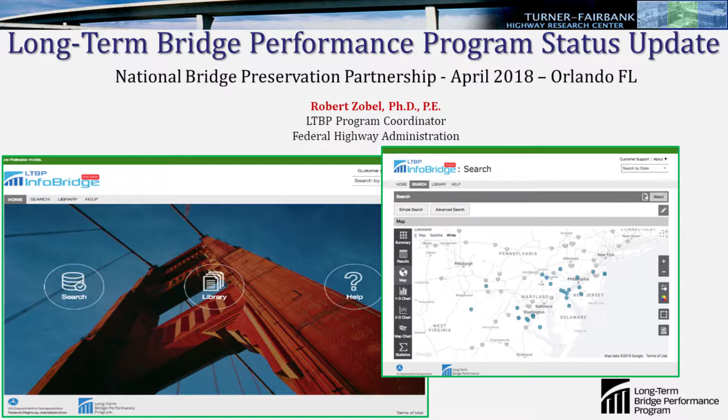Quick question. I have a couple of questions. How many folks in here, it's probably easier for me to ask the negative, have not heard of the LTBP program? Okay, so everybody's heard of it. How many folks in here have not heard of LTBP's bridge portal? Okay, so a few people haven't heard of that, so I'm going to talk a little bit about that. And you can actually see a couple of the screen splashes up here on this first page, and for those of you who are familiar with LTBP's bridge portal, it might look a little bit different to you here, and so I will talk about that.

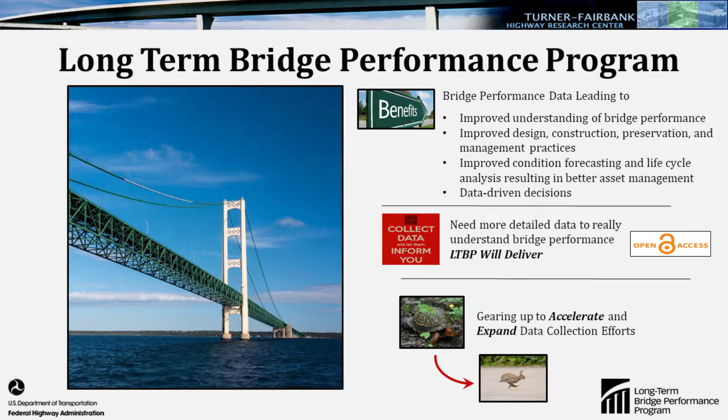The long-term bridge performance program, what we're really all about is getting out there and collecting bridge performance related data on a subset of bridges nationally. The real idea behind it is to improve our understanding of bridge performance, improve our understanding of construction preservation practices, to get a little better understanding and to know what's really the proper thing to do. Improved condition forecasting and life cycle analysis, and leading to data-driven decisions. We're really all about data. What we need is more data.

I know that some of you may have been in the room this morning when Dr. Moon was talking about both a bottom-up approach and a top-down approach for assessing data for the purposes of bridge performance. LTBP is actually involved in both a top-down and a bottom-up approach. We do recognize fully that it has taken some time for us to gear up and get going with our data collection. I'm going to talk a little bit about the data that we've collected to date. I'm also going to talk about the plans that we have to accelerate that data collection on more of a national basis. So that's primarily the things that I'm going to discuss today.

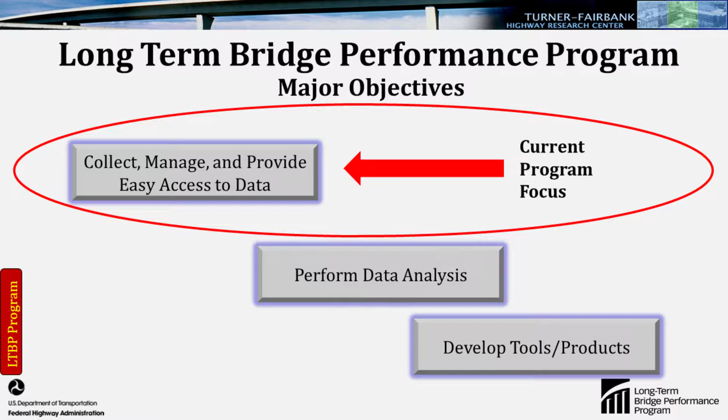The current program focus, although in the past we've been involved in collecting bridge performance related data and performing various types of analysis with that data and developing various tools utilizing that data, our primary focus right now, and probably for the next couple of years, is going to be on collecting data. So that's primarily what you'll see here. So as far as data collection for the program, I'm going to take just a couple of minutes out and talk about, from a research standpoint, the methodology that we're using within the program.

And what you can see here, without diving into a lot of details on how we developed this methodology, essentially what we did was we looked at, across the board, the entire country, the population of different types of bridges throughout the country, and we determined what the bread and butter type of bridges are and where they were really concentrated. So we ended up essentially with three bridge types: pre-stressed concrete multi-girder, steel multi-girder, and concrete box girder, which you can see here in various colors.

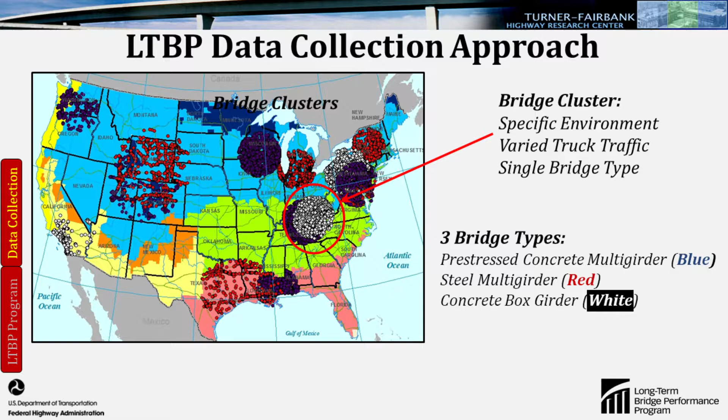What we did was then to identify within specific environmental zones clusters of each of those bridges. And the idea is, within a single bridge cluster that's all one bridge type, essentially what we have is a specific environment. There are some microclimates that we tend to see within some of these clusters, varied truck traffic, and a single bridge type. And the approach to collecting data here, it's a multi-tiered approach.

When we have a cluster of bridges, within a radius of, say, 300 miles or so, we may find that we identify several thousand bridges of a particular type. For those several thousand bridges, we take a subset of those bridges that we call candidate bridges. We take a look at NBI, NBE, and what we call legacy data mining, which I'll talk a little bit about. The idea there is to see if we're able to answer any of the questions that the program has posed utilizing already existing data.

We then, from those candidate bridges, take a smaller subset, which are cluster bridges. And then we take an even smaller subset of the cluster bridges, which we call reference bridges. For the cluster bridges, we're going out and performing various non-destructive evaluation tests, primarily on the bridge deck at this point. That's what we're concentrating on. Within a cluster, we may have anywhere from 45 to 60 cluster bridges, again, bridges of one particular type, and anywhere from 2 to 4 reference bridges.

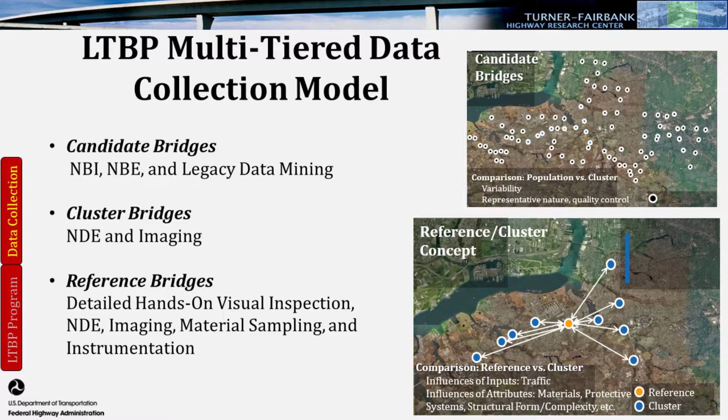The reference bridges are those that we're instrumenting, characterizing the loads, the distribution of loads, and the truck traffic on those bridges. So essentially, we're trying to render those reference bridges as transparent, in other words, to know as much as we possibly can about them. The idea then is to correlate the performance of the reference bridge back to the cluster bridges, cluster bridges back to candidate bridges, and then between clusters of similar types of bridges in different environmental zones, or even clusters of bridges of different types.

So that's the approach that we're taking, and it's beneficial to understand that approach as I talk about the data collection activities. Early on in the program, we got together with, I think it was 15 state DOTs and some other folks in the bridge community, and identified 22 or 23 high priority items. We then prioritized those down to 6 high priority performance areas: untreated bridge decks, treated bridge decks, coatings on steel superstructures, embedded pre-stressing strands, condition of bearings, and of joints.

Obviously, we can't address all of them at one time. What we're planning to do right now is really concentrating on the untreated bridge decks. And while we're assessing untreated bridge decks, we're going to do our best to also look at the joints in the deck, and if possible, without extensive resources, look at the bearings at the same time. So for the reference bridges, we're performing a detailed hands-on visual inspection, an enhanced visual inspection above and beyond what's normally done every 2 years on all of our bridges.

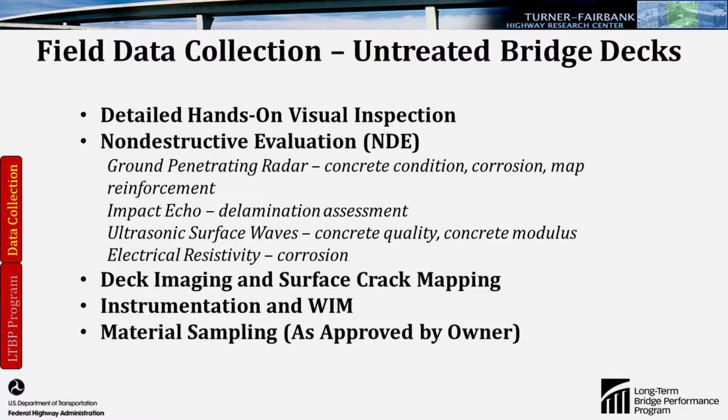The purpose is to characterize the potential corrosive environment and delaminations, but not from the same perspective as the states would typically want, such as what you were just talking about, getting a good handle on quantities to put out for bid for repair. That's not what LTBP is about. We're about research and trying to understand the inception of when that deterioration occurs, what causes it, and how it progresses. So it's a little bit different focus. In addition, deck imaging and automated surface crack mapping.

On reference bridges, as I said, instrumentation and weigh-in-motion. We're looking at a couple of different weigh-in-motion systems, really to characterize the actual truckloads that the reference bridges see. In addition, we're performing some material sampling on various bridges, as approved by the owner. Sometimes it's a little bit difficult to get folks to let us take cores out of the bridge all over the place.

So we have to be very careful about that. As far as the data collection is concerned for the program, we do have a published report where we have 51 protocols. We have more than 130 that are in draft format, and we're working on additional ones currently.

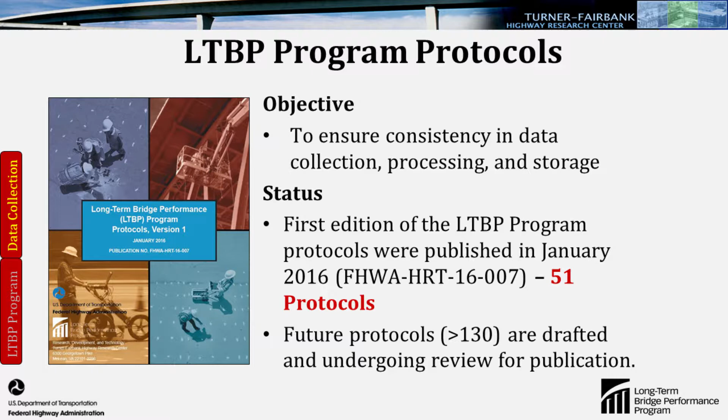The main reason for having very specific protocols is so that we can ensure consistency in data collection, processing, and storage of the data. We can't just take data from anywhere, and then in terms of the correlation I was talking about earlier within a cluster, the candidate bridges, the cluster bridges, the reference bridges, if we obtain data, for instance, from a university researcher or from a state that may have collected that data on a similar type of bridge, but may not have collected it utilizing the program protocols, we may not have consistency in that data.

So we have to be very careful about that. And that's the main reason why we have developed and continue to develop protocols. In fact, currently, we're working on protocol development for instrumentation plans for our reference bridges, for weigh-in-motion, for things of that nature, detailing specifically for the reference bridges. I will talk a little bit in a few minutes about some of the things that we're getting ready to do very soon as far as data collection.

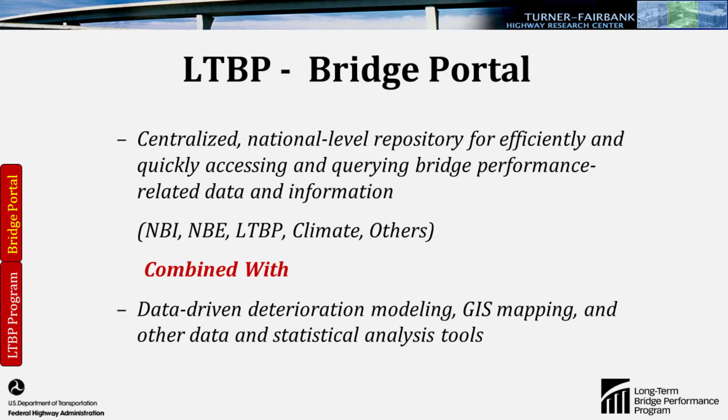We'll move on to talking about data management and the bridge portal. For those of you who aren't familiar with the bridge portal, the idea behind it is to have a centralized national level repository for efficiently and quickly accessing and querying bridge performance related data and information. So that doesn't mean just NBI or NBE, that's also weather data, that's also data that's collected by the program. All of this combined with data-driven deterioration modeling, GIS mapping capabilities, and other data and statistical analysis tools.

Now, for those of you who are familiar with the bridge portal, when we initially deployed the portal several years back, I think maybe it was in 2015, it was a long process at FHWA to get the bridge portal up and available not only to folks internally at FHWA, but generally to the public. Currently, it is behind a firewall at FHWA, and that has caused a lot of issues with access, which is completely understandable. It was very early on in the development of the portal.

Somebody saw, oh, well, you're going to have potentially bridge plans on there, which we don't have on there, but NBI, all kinds of information about bridges. Well, that's going to give terrorists information at their fingertips. And my point was you could get all of that information at that time right off of the internet. So I'm not really sure why we ended up in that direction other than the potential for security issues.

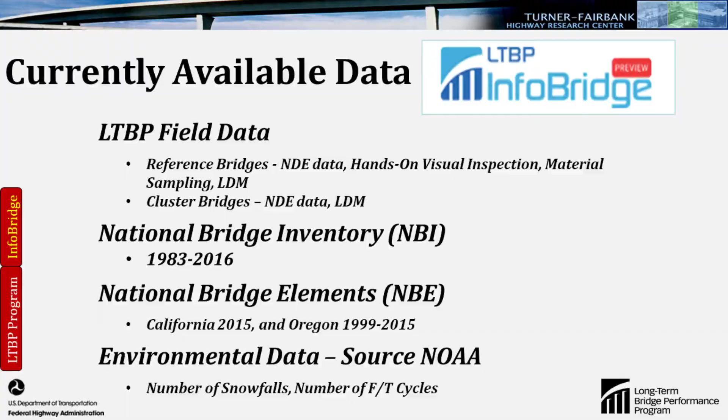As far as LTBP data, for reference bridges, NDE data, hands-on visual inspection, material sampling, legacy data mining. For cluster bridges, NDE data, legacy data mining. We have NBI back to 1983, up through 2016. 2017 was just made available, and we're going to be working towards getting the 2017 NBI and accompanying NBE up into the bridge portal.

We have some National Bridge Element data currently within, and I just said the bridge portal, within InfoBridge. We have the framework to accept National Bridge Element data into the database. So as that information is submitted to federal highways and the data is validated, we then bring it into InfoBridge, as well as it's also specifically NBI and NBE are also available directly through FHWA.

Also, environmental data currently we have for each of the bridges, number of snowfalls, number of freeze-thaw cycles. I would say the near future, we'll probably be changing that a little bit because the long-term pavement performance program utilizes a different national data set that's a much, much more extensive data set, and we will probably tag on what they're doing with environmental data.

Additionally, as far as any of the report type of formats, when you download those, this is the type of thing that you'll see with the visual inspection report. These are some of the results from the various NDE assessments that were performed. And it's really hard for me to read the dates on those, but it all shows up in that table for an individual bridge.

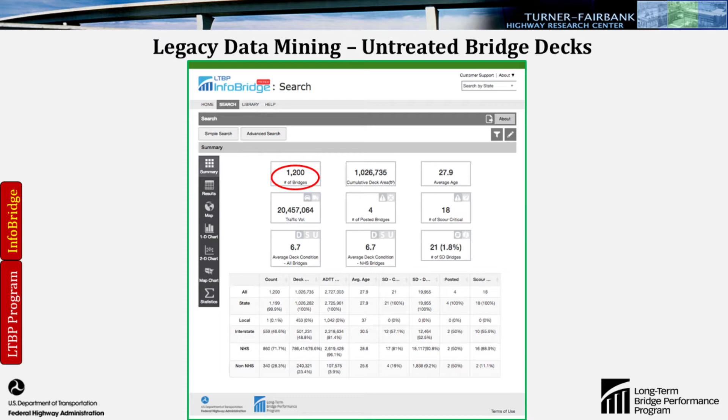Also, in terms of the legacy data mining that I was talking about, we performed legacy data mining for untreated bridge decks. We're going to be getting started as a proactive measure on the legacy data mining for treated bridge decks, but we have actually performed the legacy data mining on approximately 1,600 bridges with untreated bridge decks. What's currently in InfoBridge are 1,200 of the 1,600 bridges. There are an additional 400 that we have a little bit more work on extracting data from before we put it up into the database.

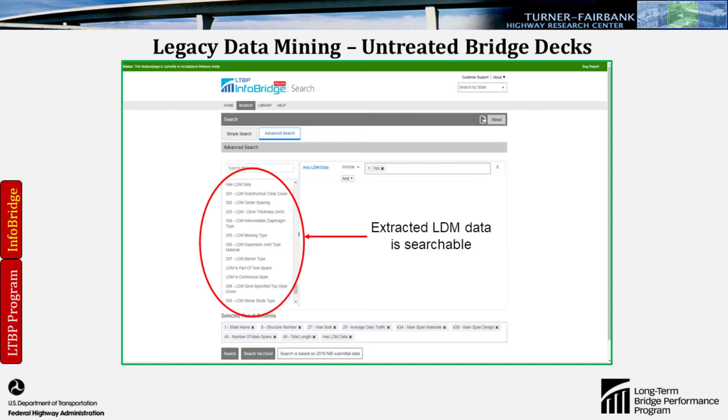And to give you an idea, some of the extracted legacy data mining, it's searchable. So as an example, and it's very difficult to read what's up here. I'll talk about some of what's up here, but just as an example of one of the things that you might be able to do with the Bridge portal utilizing the legacy data mining.

If you wanted to maybe gain a little better understanding of the influence of girder spacing and deck thickness, you could perform a search that says, I want to look at all of the bridges of a certain type, if you want to do it that way, that has a deck thickness, say, between 8 and 12 inches, and has a girder spacing maybe between, just throwing some numbers out there, between 7 and 9 feet.

So you can start to perform these types of analyses and look at NBI condition ratings, potentially even look at some of the LTBP data for some of those bridges. But this is something that we've never been able to do before because that data was never in that kind of format for us to be able to search it.

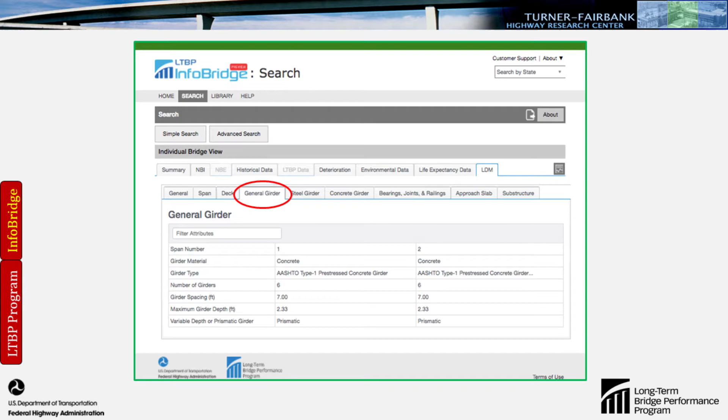Girder information, here it's telling us for pre-tension, the type of girder, the girder spacing, and so on. There's also information pertaining specifically to reinforcement for that girder. If it's a pre-stressed girder, it provides information pertaining to the pre-stressing reinforcement, shear reinforcement, and so on. So there's a lot of information available in there.

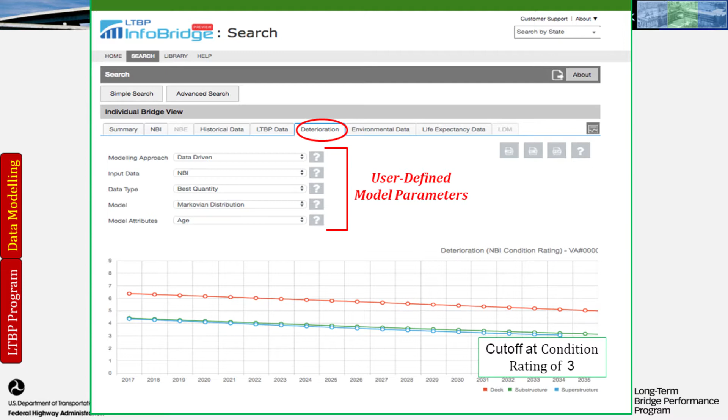As far as data modeling within InfoBridge, currently we have deterioration modeling with user-defined model parameters. What's being shown here is a Markovian distribution. We also have within InfoBridge what we're terming a life expectancy model.

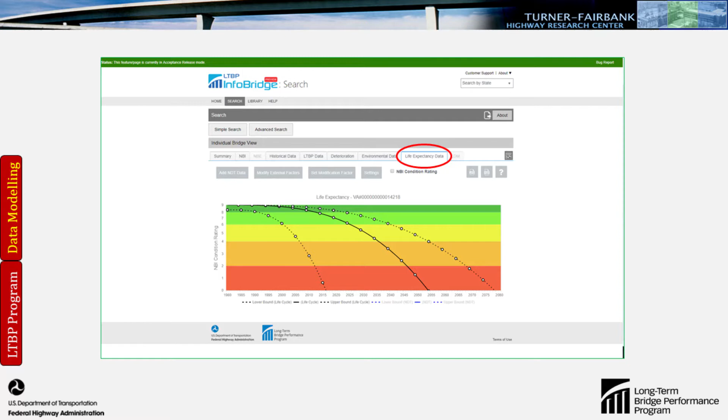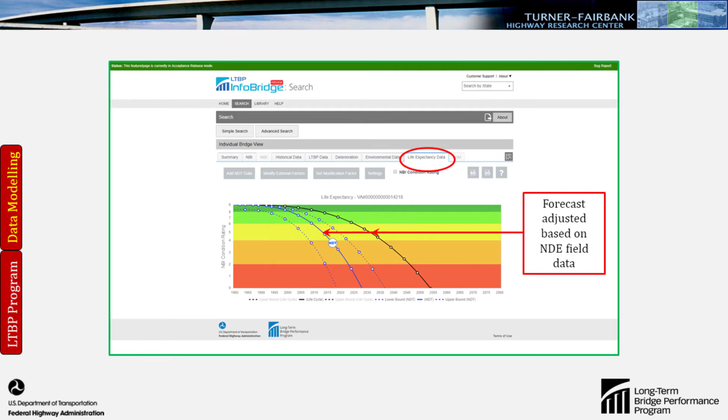And what this actually does is, if you were in the room this morning when Dr. Moon was talking about that bottom-up approach, this is actually utilizing NDE data to sort of correct the deterioration curve. So you can actually enter in NDE data in here, and you can see here the forecast is adjusted based on NDE data. And for the data that I placed in here for this particular bridge, you can see how the forecast changed from here all the way over to here just based on the correction utilizing that NDT data.

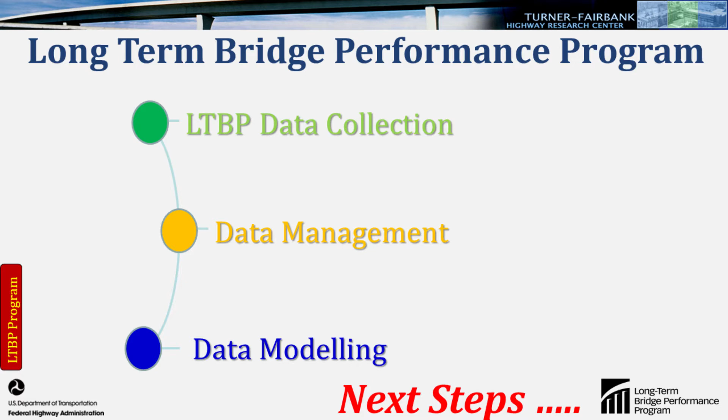So as far as the next steps for the program, field data collection, I already talked a little bit about this. Because of the delays that we have currently, we're getting started on field data collection in 3 clusters using handheld NDE. At the same time, 3 of the steel bridges, as sort of a pilot, we're going to be looking at the use of UAS on those 3 bridges to see how it may be able to augment our data collection capabilities.

RABIT CE data collection, that is slated for the fall of 2018. We should be receiving the units over the summer, then we have to train our data collection contractor, so it's going to take a little bit of time to get those out into the field. Pooled fund study, the influence of vehicular live loads on bridge performance. Currently, we have 2 bridges instrumented, with a 3rd one planned to be instrumented.

Strategic research matrices, for those of you who are familiar with LTBP, they, a long time ago, developed more or less what they now call their data analysis plan. It was what they called originally the LTBP tablecloth. It was really looking at, at least for LTBP, what research is currently being performed, what are the gaps in that research pertaining to bridge performance.

The purpose being the development of these strategic research matrices to allow us from a programmatic standpoint to better understand whether there are gaps in research that is currently being performed or planned to be performed. So really for us it's more of a programmatic planning tool. We're also in the process of developing a technical paper competition that would be based on utilizing LTBP data.

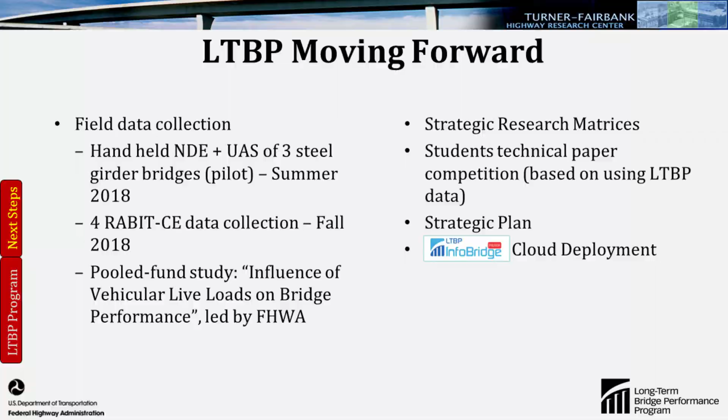We're also in the process right now of preparing a combined strategic plan for the long-term infrastructure programs, meaning long-term pavement performance and long-term bridge performance. And as I also talked about, the cloud deployment of InfoBridge. So this is really a good picture of what you should expect to see over the next year's time with LTBP for this initial data collection using handheld.

I think we're looking at somewhere around 38 bridges, and almost all of those bridges are bridges that we have already been to one time in the Northwest or in those Gulf clusters. A lot of us states are going through a little exercise for the Federal Highway Administration called the Transportation Asset Management Plan. And part of that is doing life cycle cost analysis.

Now in Florida, we started developing deterioration curves a long time ago. We actually have a tool that we've developed. But I know that a lot of the states don't have that tool. It looks like these clusters are the perfect opportunity to do that if you could match yourself into a cluster. Of course, it's being worked out now by AASHTO BRM. Is this something that is going to be used by AASHTO BRM? Is this something that's going to help refine this model?

The idea is not to refine AASHTO BRM. A couple of things I'd like to talk about with this. It's probably going to be a little bit of time for LTBP before we really start doing a lot of work in this area, because what we really need more than anything is sound quality data. We don't have enough data at this point to develop reliable deterioration models.